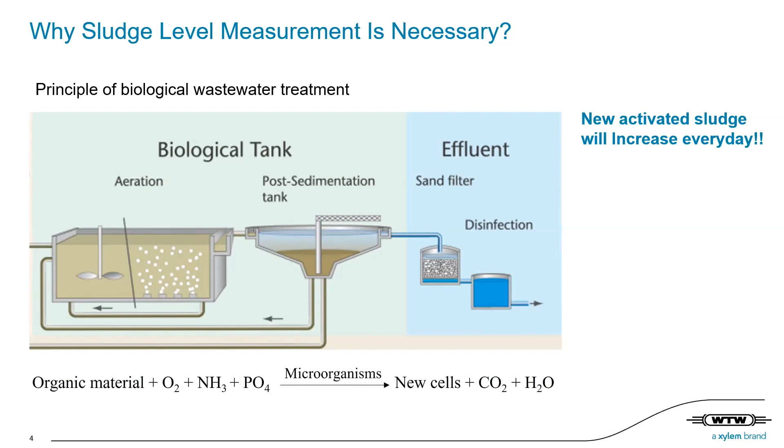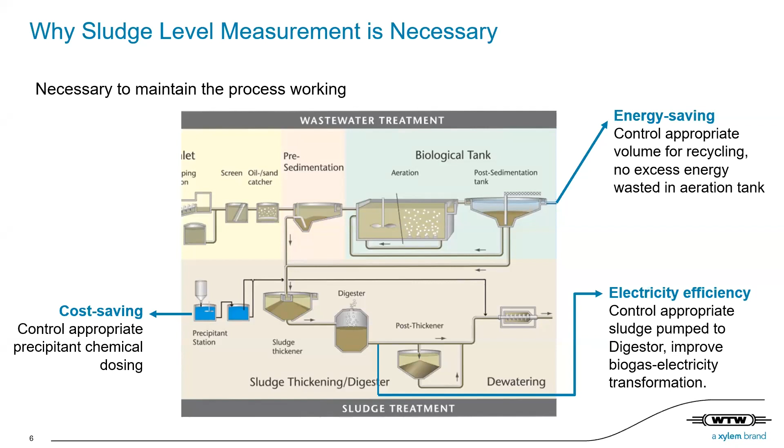So next, I will let Li handle this poll question.

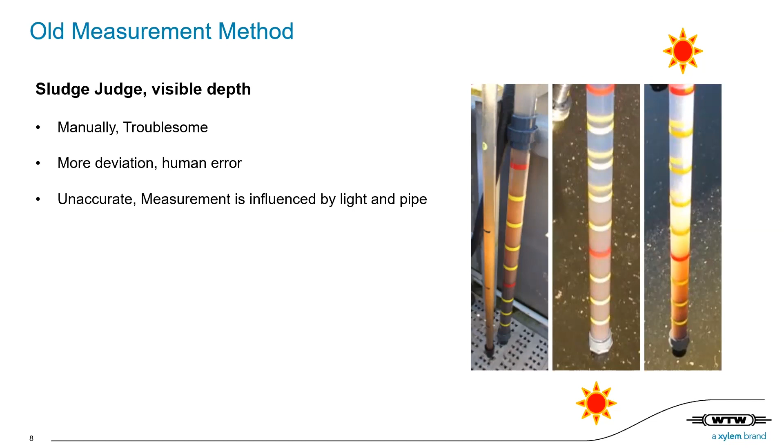Let's go to the next slide. We want to introduce the Xylem WTW sludge measurement sensor, its interface level measurement sensor, or simply the IFL sensor. This sensor has several features, let me share with you.

Firstly, it has an intelligent signal processing system, so it can ensure your result is reliable. Secondly, it's very easy to use, no need for any calibration. Thirdly, it's contact-free and maintenance-free with a cleaning system, making maintenance much easier. Lastly, the echo profile can be shown on the monitor in real-time, allowing the customer to check the sludge level in real time.

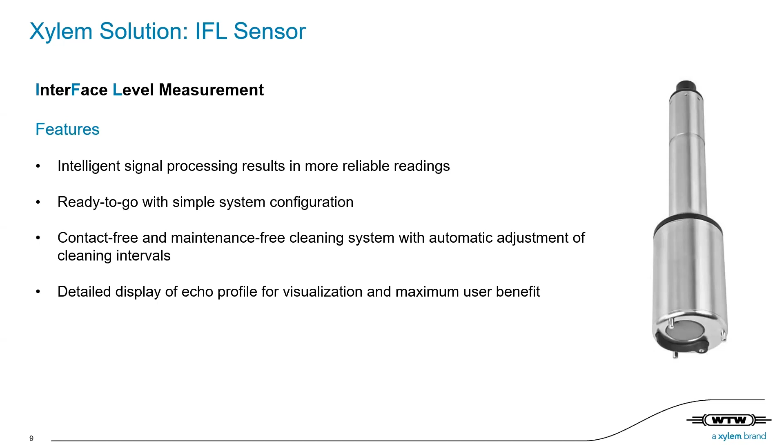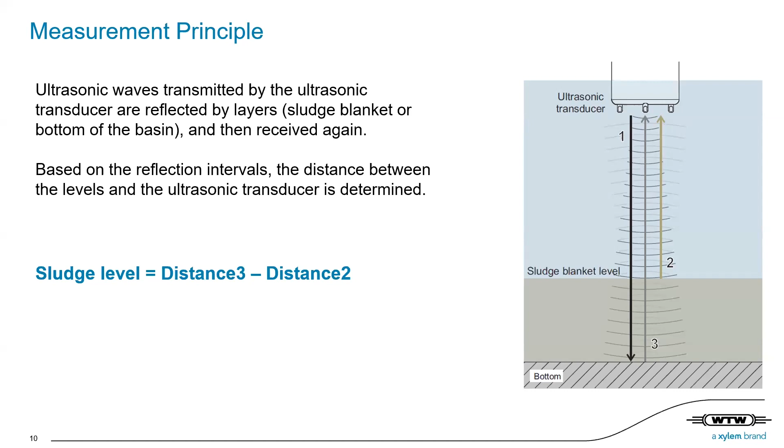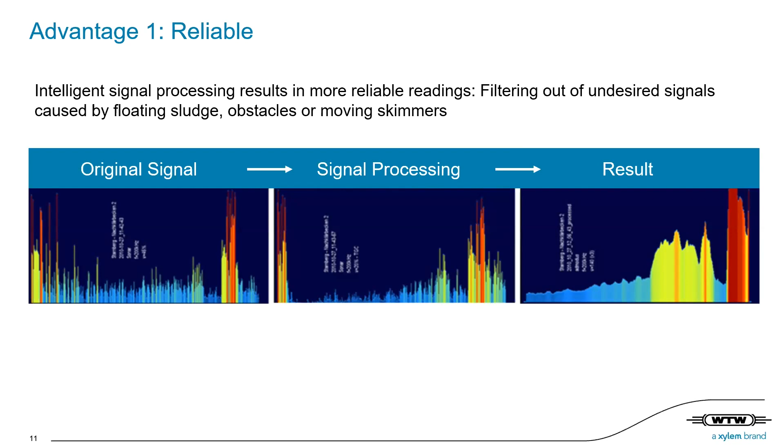Next we want to introduce the advantages of the IFL sensor. Firstly, as I said, it has the intelligent signal processing system. This system can rule out undesired signals caused by floating sludge, obstacles, or moving skimmers, helping you get a reliable and correct sludge measurement level.

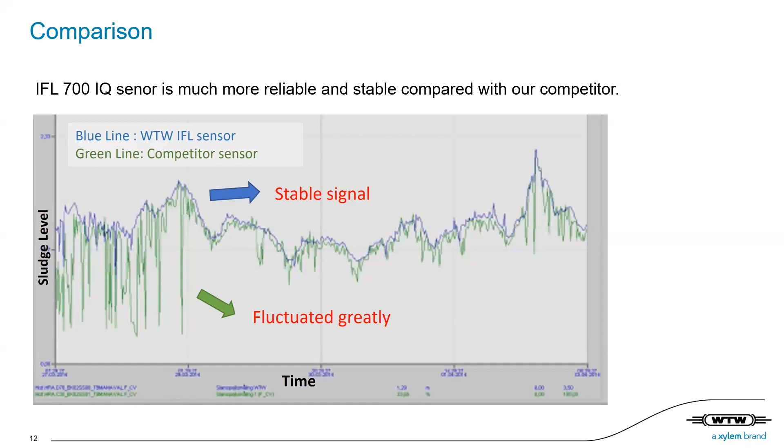Secondly, it's very easy to use because it requires no calibration - you can just set it up and use it immediately.

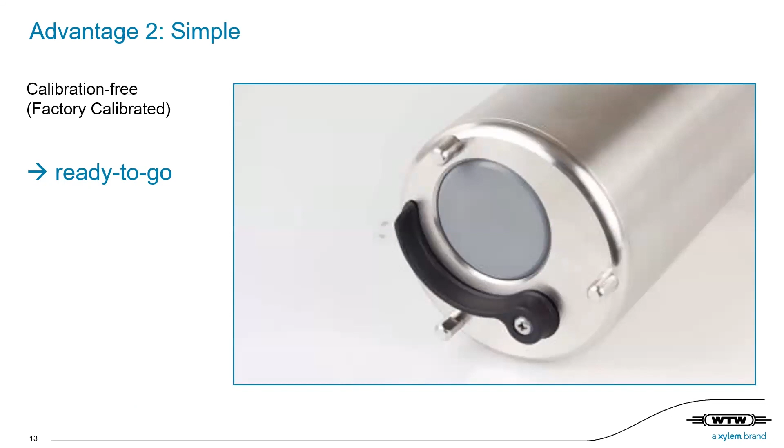And next we want to show it's a contact-free and maintenance-free sensor. It has a special scraper. This scraper is really very convenient for the customer, so no need for any maintenance for the sensor. As I think some customers have experience cleaning the sensor frequently, if you use the IFL sensor, no such work needs to be done. You can just set it up in your monitor.

It can clean the sensor based on your own time interval. You can see the figure also shows even in very dirty water with a lot of algae, there's no influence affecting this sensor part. So really a very good sensor.

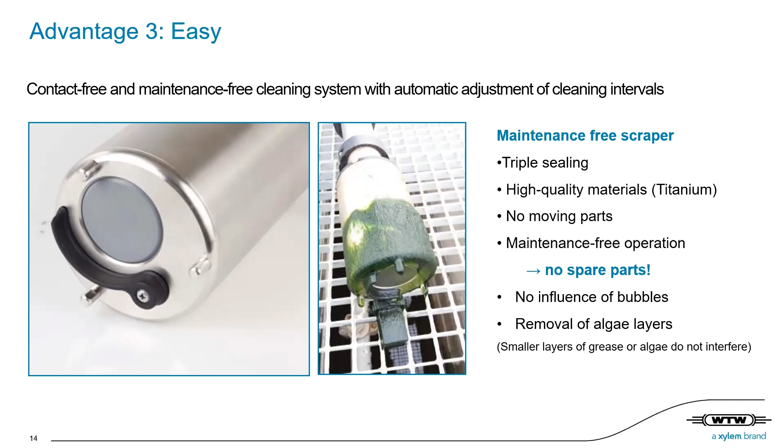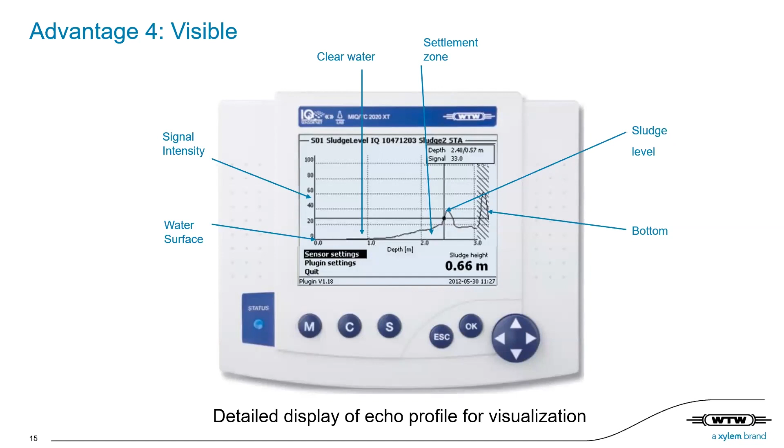And lastly, you can check the echo profile on the monitor. You can see a lot of detailed information on the monitor, which helps the customer check the sludge level in real time. So, next poll question.

So Li, please help with this. Yes, let me launch the second one. Okay, what's your key issues in sludge level monitoring? Okay, let's get started. Back, launch the second one.

So the first one: inaccurate measurement, difficult to set up and maintain. The third one: short life, frequent breakdown. All right, so this is a multiple choice question.

Okay, let me show the result. Can you make a guess? Okay, if you can see it. I think maybe maintenance, but let's see the result. Thanks, Li.

Inaccurate measurement - okay, so that's the first one. And the second one is actually expensive, cost related - that's third. The second one is difficult to set up and maintain. The fourth one is short life, frequent breakdown.

Yeah, thank you so much for the answers. I think we get to know the pain points everybody is experiencing. Let's continue. Okay, let me stop sharing and Tao, please take over.

Okay, thanks Li, thank you so much for the answers. Actually, the accuracy of the sensor is really a very important issue for us, but please trust our product - we can give you reliable answers, reliable data. For the cost, we will try our best to give the best price if we can. Okay, so let's go to the next one.

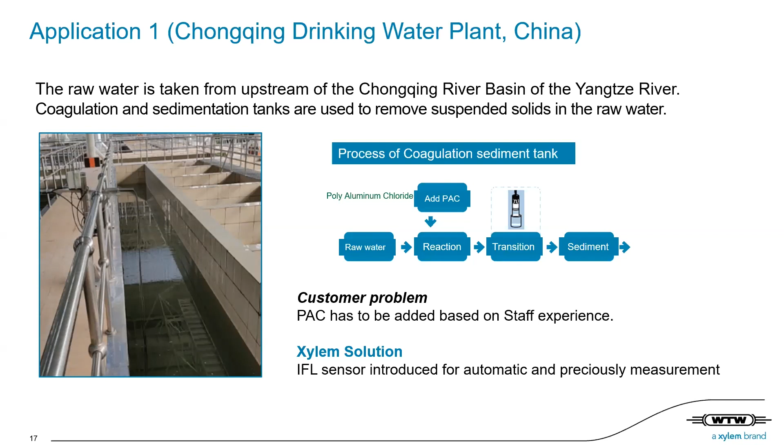Let's see the next slide. So, by this recommendation, the customer has used our IFL sensor to get accurate data and also an automatic environment. They are very happy with our solution.

So secondly, let me show another application story, also from China. This application is from a wastewater treatment plant in Beijing, where the customer previously used a TSS portable meter to measure the sludge level.

I think for poll question one, still 38% of our audience selected this method. This method is really convenient and is also mostly used in many wastewater treatment plants. But the problem is you have to calibrate the sensor frequently, and staff need to measure the sludge level twice a day in this plant, so it's sometimes troublesome.

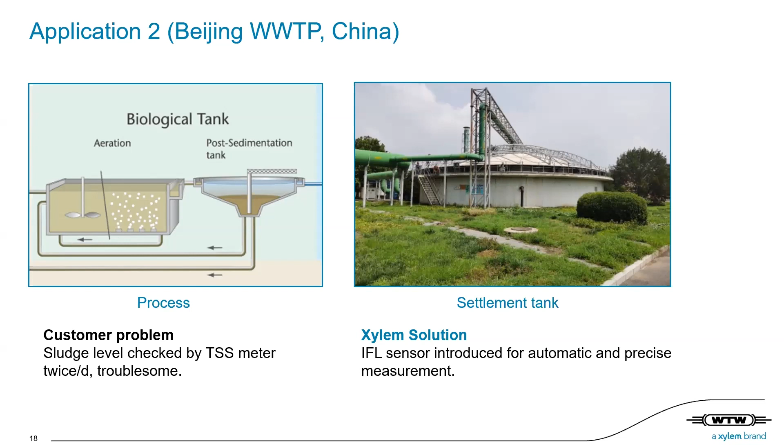So our solution still uses our IFL sensor. Let's see the result. After they used our IFL sensor, the result made this work much easier.

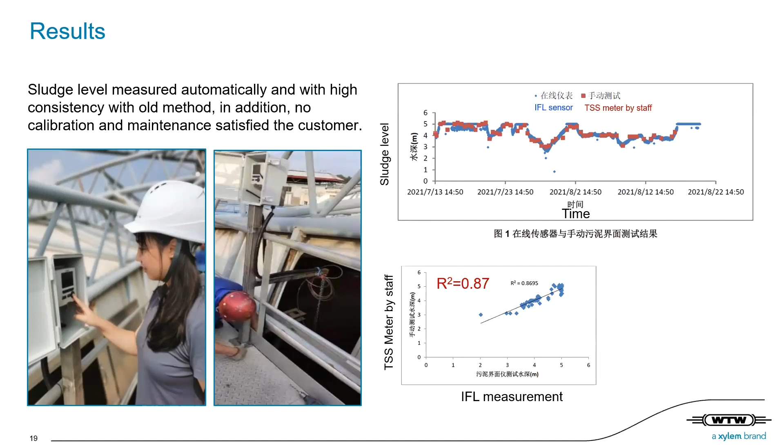So let's see another application case. This case, I guess some people, some customers, know this - it's a very special application in a wastewater treatment plant.

As known, in big wastewater treatment plants, the rotating scraper bridge is mostly used. But this rotating scraper bridge sometimes makes it difficult to find a good position for setup of a sludge level sensor. If we set the sensor in the central part, sometimes the cable cannot connect to the PLC.

But if we set it on the edge of the tank, it is not a good position either. So to solve the customer's problem, we recommend our IFL radio wireless connection. It has solved all the problems. The perfect position in the middle of the bridge can be used, and also the wireless connection can avoid using cable connection for the PLC.

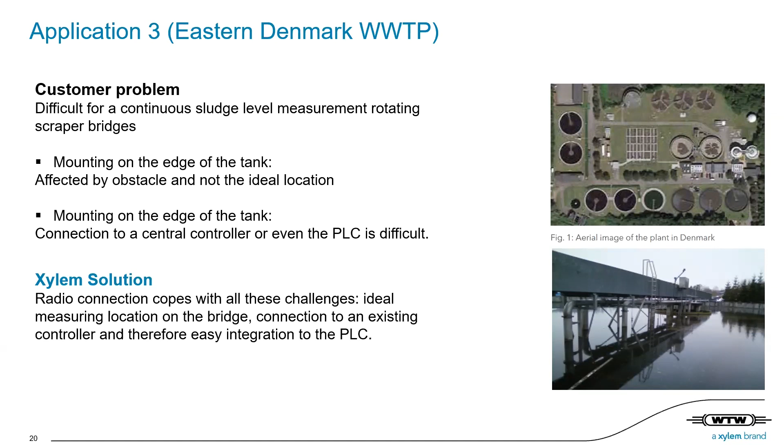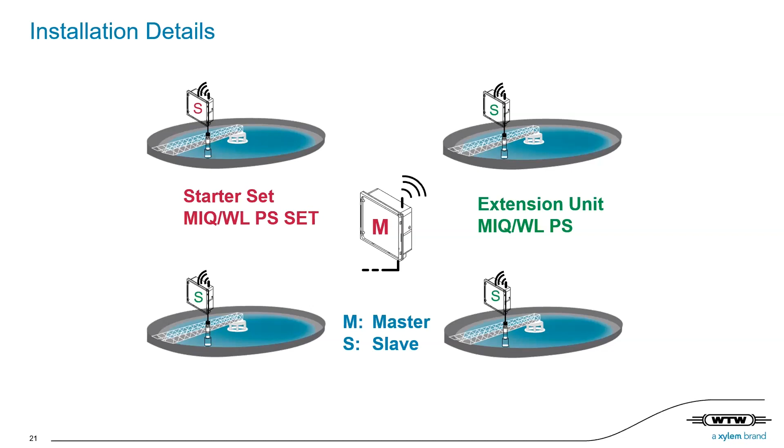We also have a slide to show how it worked. You can see this. We just use a master controller. By the radio wireless connection, we can control this 4 slave controllers for the sludge level measurement.

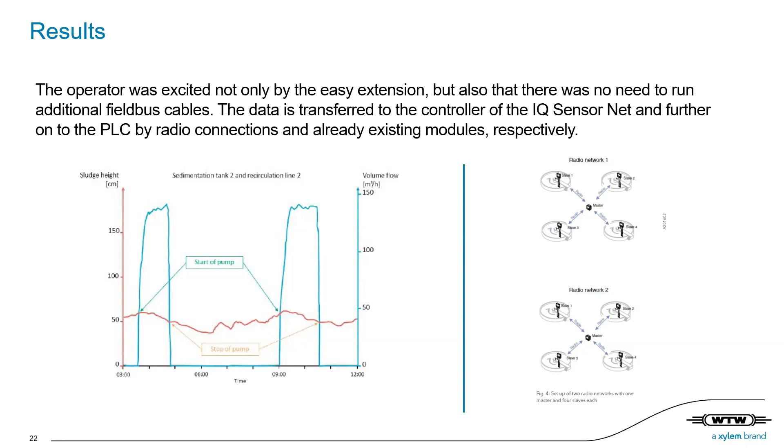So the result is satisfied by the customer. This figure shows the customer using our IFL sensor to control the pump. When the sludge level gets to this value, the pump will start. When it gets that value, it will stop by this method. Also, by the ideal position of the sensor setting, this makes the work much easier and the pump works much more efficiently. So also this similar application has been used in Japan and South Korea.

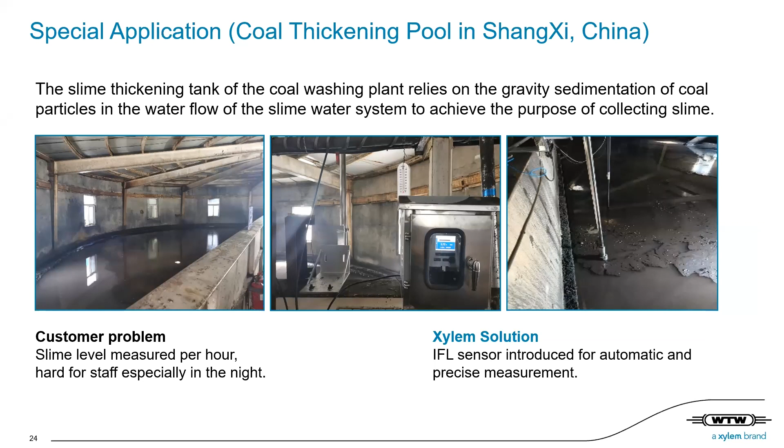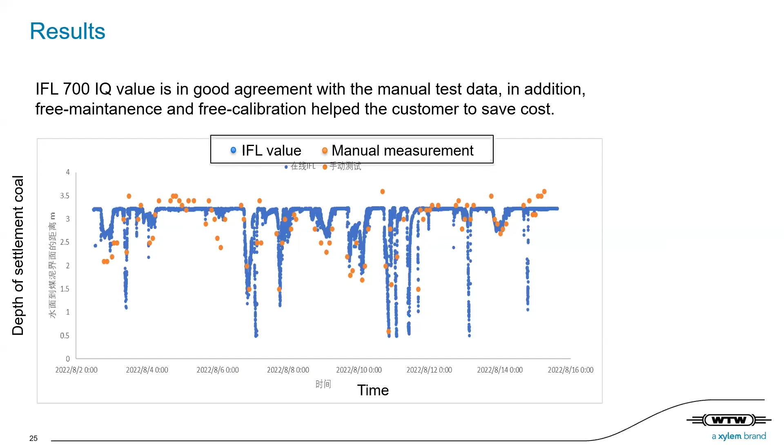So we can see our IFL sensor is not only used in the wastewater treatment plant, but can also be used in some other settlement tanks, like this one. So that's all. I think for the next part, I will let Li handle this.

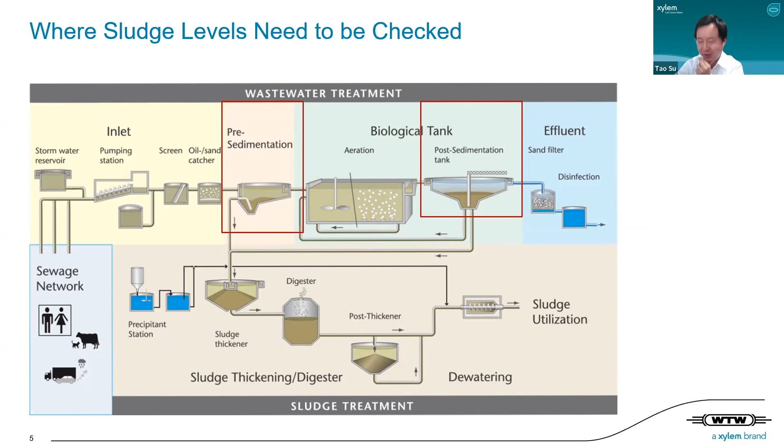Yeah, very much, yes. It actually clarifies the very important point of why we need to measure the sludge level, and it becomes more and more important, especially nowadays when we are talking about energy saving and carbon footprint. That makes a contribution to our plant, to our society. That's just one important step - having the sludge measurement, that's all about it.

Yeah, automatic sludge level measurement can solve this problem and save energy, automate, and eventually also be maintenance free. So there are many benefits. I think for now we've already hit our 1 hour mark.